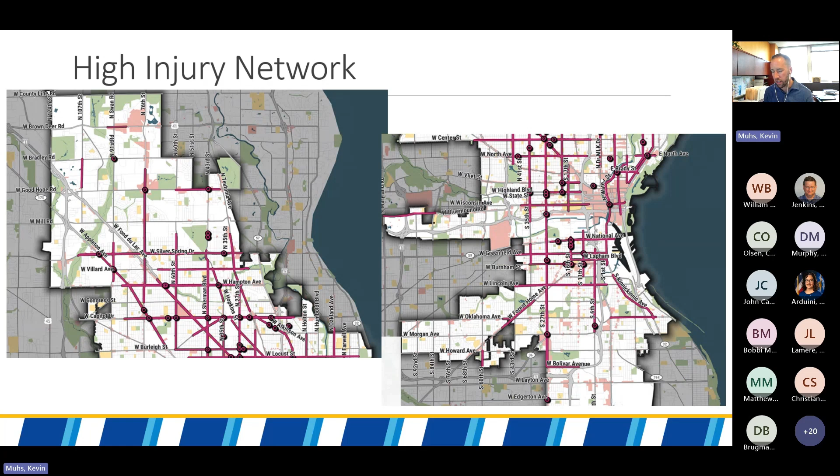So let's get into some examples of what we're doing. So West Walnut Street reconstruction project. This was actually completed this past late spring, early summer '24, but the lion's share of the work was done in 2023. This project is a full reconstruction funded with federal Surface Transportation Block Grant dollars and local City of Milwaukee dollars. This project was all designed before I got here, so I'm not taking credit for this, but it's a great project that highlights a lot of the elements that we're looking to include in future projects.

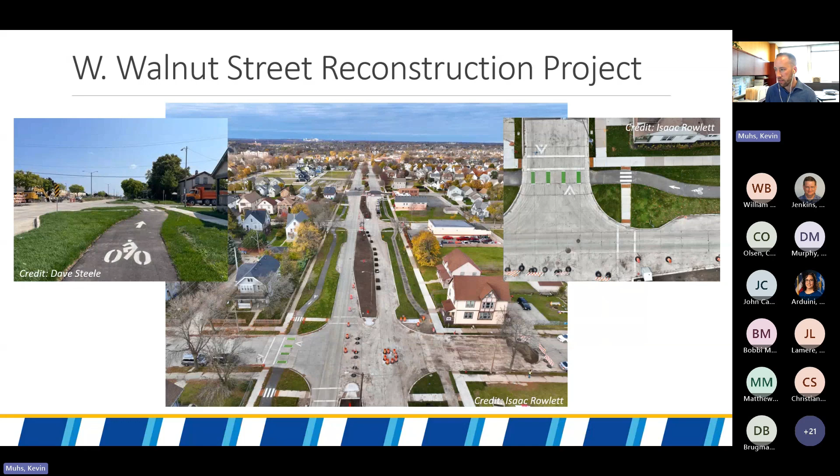Traffic volumes on the street were definitely low enough that this was a relatively easy thing to do from a traffic management perspective. The project that I just showed was a full reconstruction west of Interstate 43 in the city for 8 to 9 blocks, basically. East of the reconstruction, we wanted to continue those protected bikeway facilities, and also wanted to continue the traffic calming. So almost in coordination with that project, we did put in a retrofit project from I-43 to Vel R. Phillips Avenue, which is 4th Street. So 20th Street to 4th Street essentially was done almost at once.

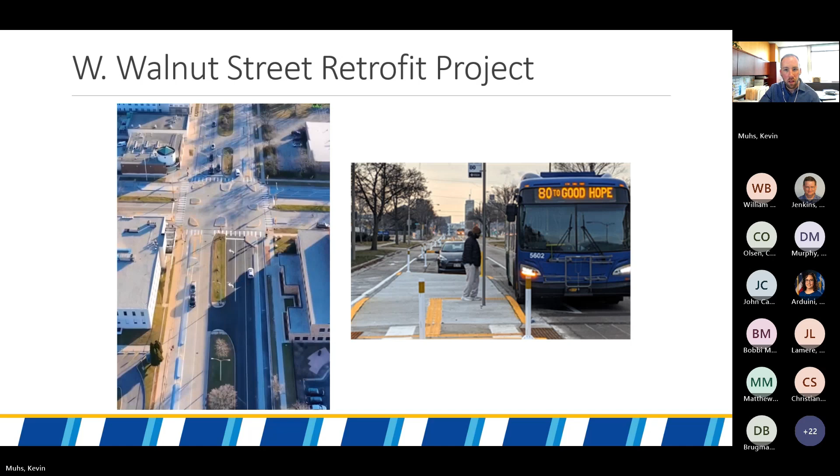A couple other retrofit projects. I just wanted to show you kind of the span of things we're doing. The theme here is, use horizontal deflection or vertical deflection to try to manage speed, right? I think many of us are very familiar with these tools, but I just wanted to show kind of the range. So the two previous slides, West Walnut Street to the west was a full reconstruction. To the east was probably our heaviest duty retrofit we've done. A lot of concrete added, not necessarily aesthetically pleasing, which is some of the feedback we've gotten.

This one, we had some interesting challenges with neighborhood feedback, and we're actually working through some modifications to it to address some of the concerns we heard from the residents. Some of those were around the aesthetics, which I'm happy to answer questions about if people are interested. But we did have great success in this corridor on our before and after speed data, and I'll share that in a little bit.

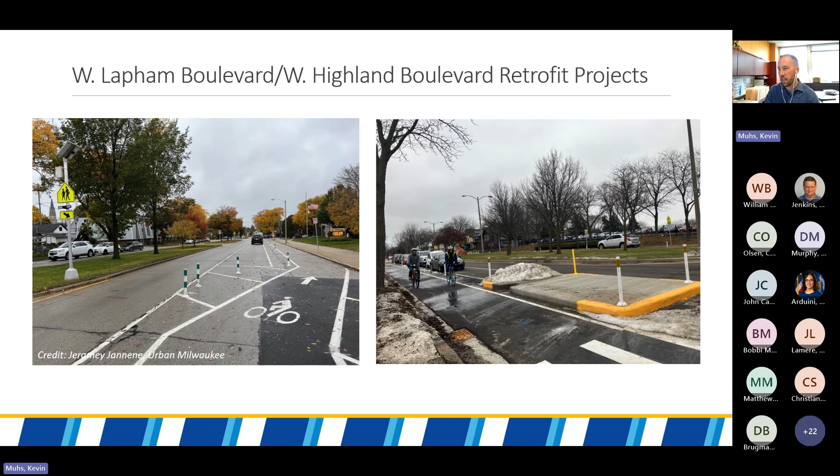I mean, obviously we want people to use it, but it's really there to take up the excess space that we wouldn't have anything else to do with if we didn't reallocate it to bikes in these areas. So long term, we're building out that bikeway network over the next few years and beyond. But right now, both of these are isolated bike facilities. They're not part of larger corridors, and it's really more about the traffic calming and safety benefits and speed management benefits.

But the main idea here, so Appleton Avenue is one of our angled streets. It's not on the grid like much of the rest of the streets in the city. And so again, as any engineer will know, that's going to lead to a lot of awkward sight lines, bad sight lines, dangerous sight lines across the corridor. And then we were also seeing, again, a lot of excessive speeds.

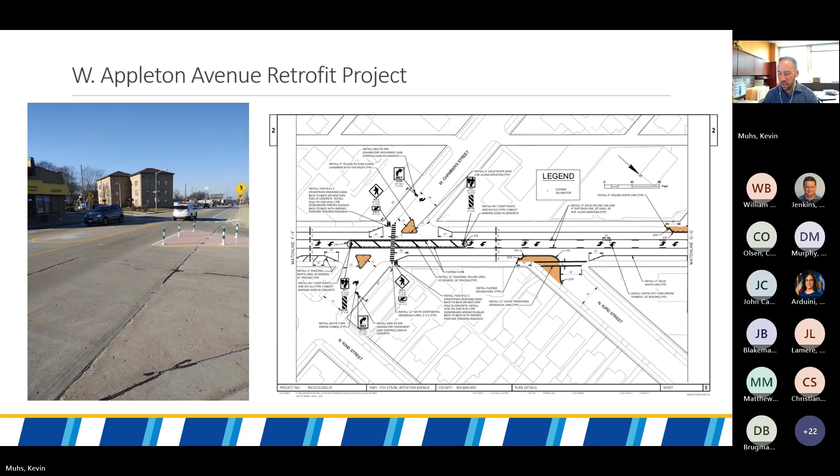Or pedestrians, I should say. I did want to provide some examples of spot improvements too. Across the city, many of these end up being more on neighborhood streets, but not always, and they can take a lot of different forms.

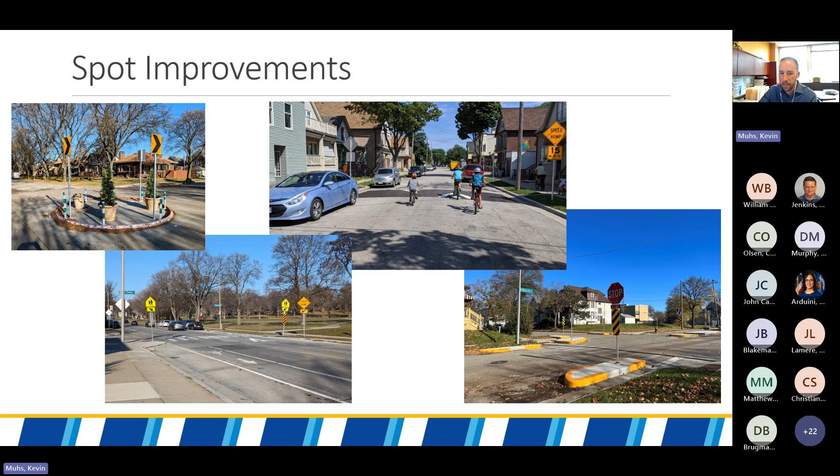From an engineering perspective, it achieves most of what we want: shrinking the crossing distance, shrinking the mouth at that conflict area, improving the angle of the turns, which you can see further out in the image, and avoiding most of the potential utility and drainage conflicts that can really increase the cost of an installation. So we've been trying to copy-paste those in as many places as makes sense across the city. So what does this look like?

We do collect, and we're actually expanding our collection of before and after data. Mostly this slide is all speed data—it says crash and speed data on top, but we're not collecting crashes yet on these because most of these are too new for that. I'm not going to read this slide off; my understanding is I'll send over my PowerPoint so it can be sent out afterwards. You can take a look if you'd like. But I did want to highlight one because I showed it.

So the Highland Boulevard project between 35th and Vliet Street—already described it to you, but it's a 4-to-2 lane conversion, with parking and pinned-on concrete island protected bike lanes. I tend to look at the column all the way to the right as far as impacts, although all 3 of these columns are important.

Basically, most of this is 48-hour speed data collected before the project and then collected a minimum of 3 months after, sometimes much further than that. Generally collected at roughly the same time of year so we're trying to reduce the amount of noise in the data and make it as comparable as possible. So you can see on that Highland Boulevard project, before and after, we reduced the number of vehicles driving more than 10 miles an hour over the speed limit from 17% to 4%—a 13-point drop.

And you can kind of see the difference across all these different corridors. I may be overgeneralizing, I want to be careful here. I believe everything on this corridor, when these data were taken, was signed for 30 miles an hour. I think all these streets were signed for 30. So if you're looking at that median speed, that's what we're comparing against for the speed limit.

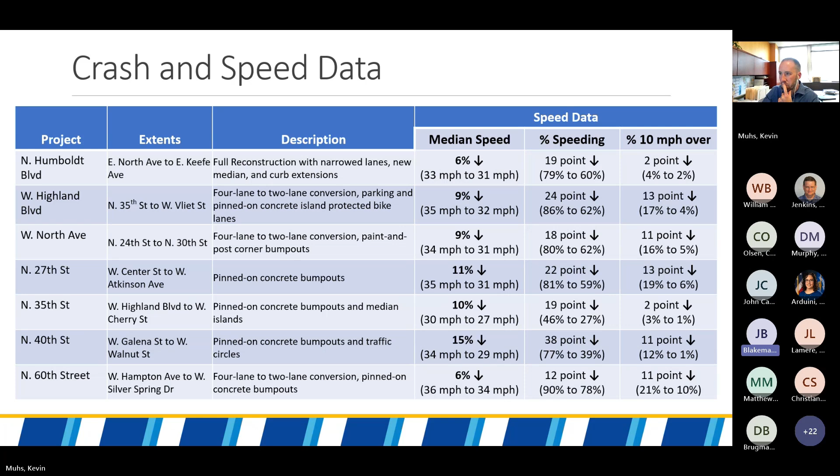Good thing Joseph's here.

So we did, and this is definitely not a rigorous engineer's crash analysis, just to be clear. This is just kind of a quick grab of the data because it's too soon in many cases to do a real crash analysis. But we did want to take a look at a couple of these projects in a little bit more detail. So these are two projects, and really I just want to focus on Lapham Boulevard on the bottom there. That's the paint and post one that I spoke of.

This one had the percent speeding and the median speed drop about as aggressive as I've seen anywhere in the city. And really the reason I'm pointing this out is because we do get feedback from some within the city that the plastic post projects aren't effective and we should just only be doing concrete. We don't really have the fiscal resources to only be doing concrete. And so we did do before and after data on Lapham Boulevard, partially because it was all paint and post and we got some negative feedback on that.

And it turns out that it was extremely successful. So successful that the residents accused us of making up the data, to which the alderman for the area correctly said at a public meeting, they wouldn't make up the data. They just wouldn't tell us they had it if it wasn't good. So we did not forge the data.

So it was very effective at dropping the median speeds. Obviously, on this crash data, it's way too soon to see if it's been effective. But nonetheless, we're hopeful that early returns are good, and we hope that continues.

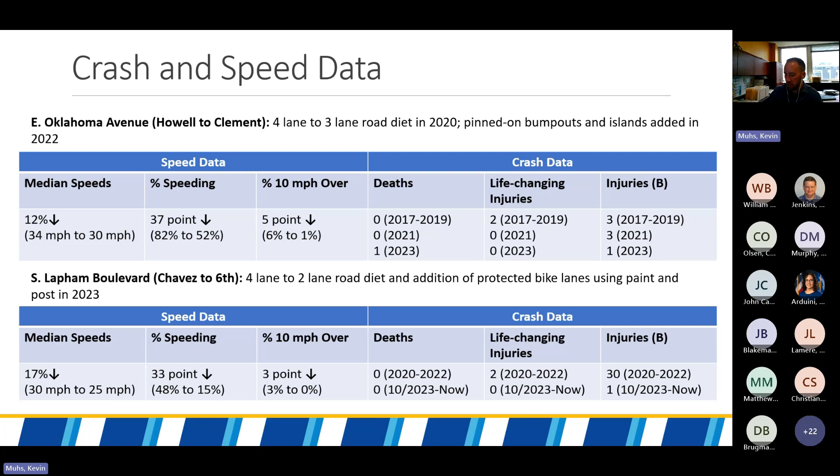Just wanted to point out, with those high injury networks, the type of things we're doing. So I try to avoid what some call counting widgets, just tallying up our output, how many things are we building. I really prefer to look at the outcomes, the speed data and the crash data as we can gather it, and we have enough time to look at the crash data appropriately. But I did just want to highlight these two maps because they kind of show the spread.

On the left is the speed humps, that's almost entirely resident requested and resident led. And so you can see how widespread those are on residential streets across the city, not all residential, but on side streets across the city. And then traffic circles are in blue, and those pinned on are actually bump outs of all kinds. So full reconstruction curb extensions, pinned on concrete bump outs, and paint and post bump outs are shown in orange on the right. And those tend to be more of our corridor treatments, which is why a lot of these are in a linear fashion on the right, the orange ones.

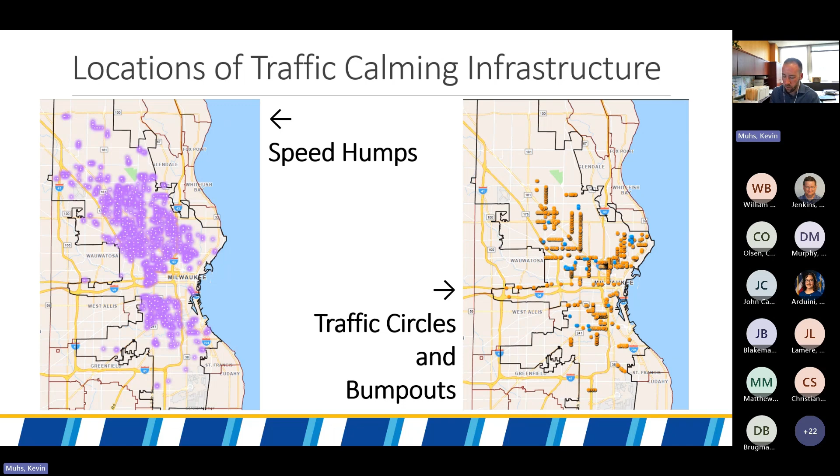I don't think I really need to go through this, I do want to leave enough time for questions. So I'm just going to skip through this, but if anybody's got questions about paving or funding sources, we can talk about that. And then I think I'll turn it over to questions now because the rest of this is just a few pretty pictures, so we don't need to show that. That can be part of sending it out later.

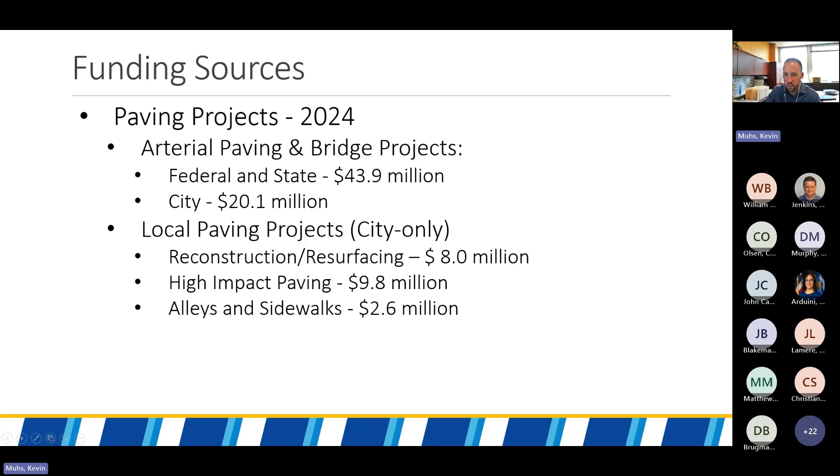So with that, Christian or Daniel? Yeah, I think Joseph's been answering some questions in the chat, but if anyone has anything else to bring up, feel free to ask now. I did skip over the snow plowing, I wanted Kevin to go ahead and answer that one. I know that comes up a lot.

Yeah, that's a great question. So infrastructure, we design, operate, maintain the physical infrastructure. We do have an operations side of the house that does street sweeping, snow plowing, forestry, and sanitation, among other things. And so we do work closely with DPW operations on these projects.

They have been very game and good partners for all the crazy stuff we've been coming up with on the infrastructure side. So the way we designed that retrofit on Walnut and 6th is that everything has at least an 8-foot minimum width, from curb face to curb face for 8 feet clear, because that is what our pickup truck equipment uses as their blade. They've got an 8-foot V blade on the front, so we did specifically design it so the pickup truck can go through.

Basically, the regular large salt truck or packer will do the driving lanes and make those turning maneuvers to get through and clear that. Then the pickup truck goes around in kind of a circle, or depending on how they're clearing everything else, a couple passes or a circle to do the cleanup. We recently had a meeting with the specific staff who were clearing that intersection last winter, learned some useful things, and generally they were game for the challenge, which is great, and I really appreciate it.